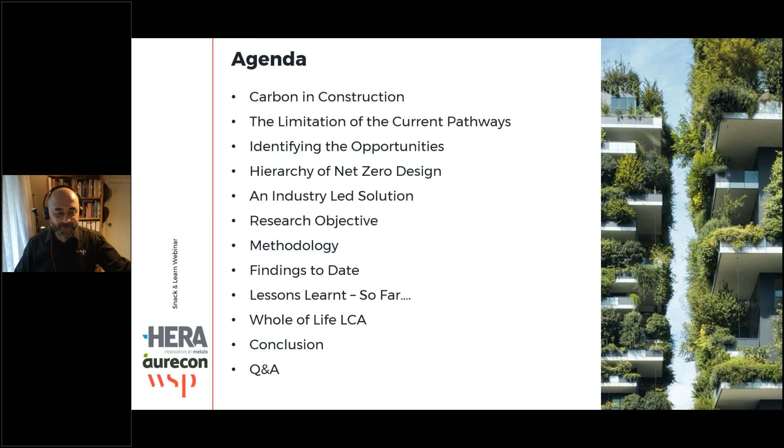Okay, let's get the show on the road. There's a lot to talk about today, so you can read this later at your leisure. I'm really keen to get into it, but we're going to talk about how we're going to solve the climate change problem. So carbon in construction, this is the industry that we are in.

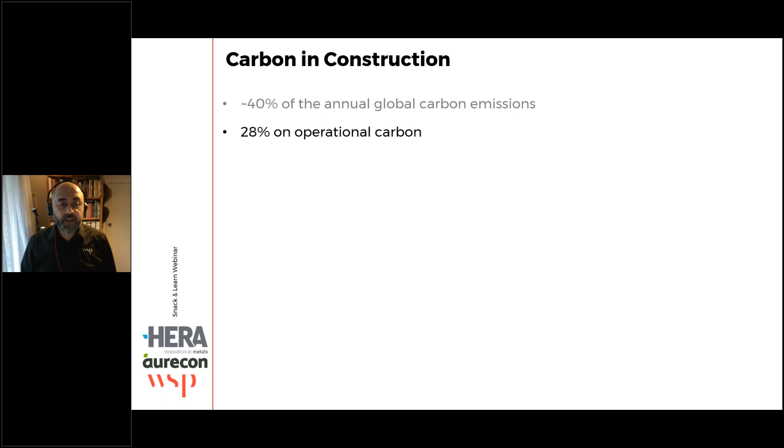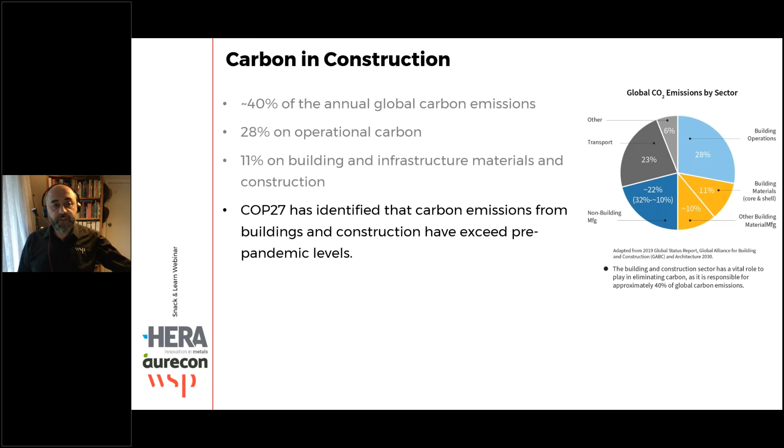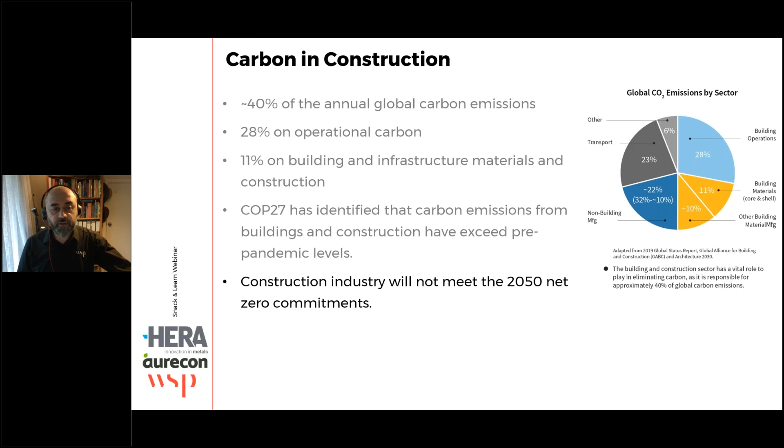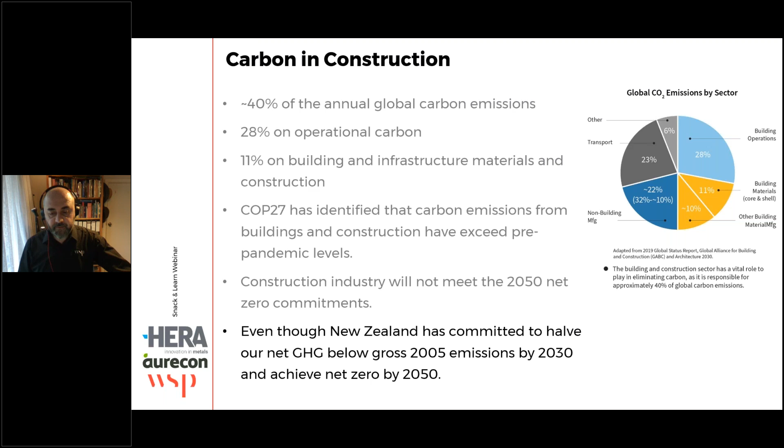Now, unfortunately, COP27 had identified that carbon emissions from buildings and construction have exceeded pre-pandemic levels, which is not good. There's an expectation that the construction industry will not meet the 2050 net zero commitments, even though New Zealand and other parts of the world have committed to halving net greenhouse gases below gross 2005 emissions by 2030 and achieving net zero by 2050. So we have a bit of a problem on our hands.

So why does it matter? Well, what we do know is the climate is changing. It's a fact of life, resulting in extreme weather events, as we saw in New Zealand with Cyclone Gabrielle, and other parts of the world are also experiencing extreme weather events, especially flooding, which have devastating consequences. The solution is to reduce the volume of carbon being emitted.

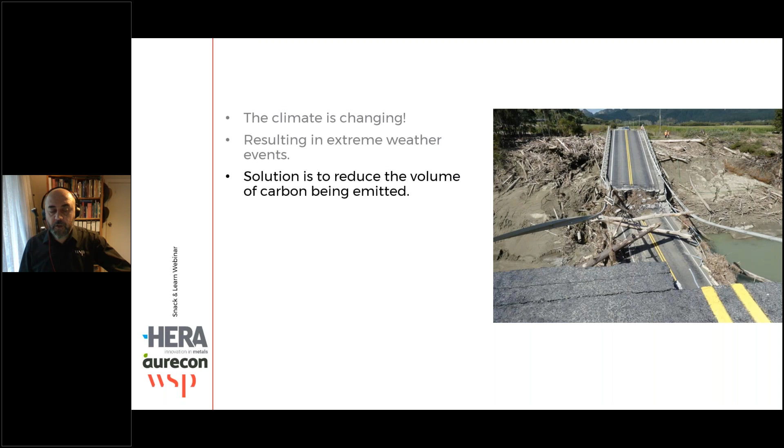Now, there's a bit of a limitation on the way we're going with this. The construction industry, based on my observations and what we're seeing, is currently focusing on carbon footprint accounting. There's a lot of dependence on offsetting, as we saw in some of the government expectations on how their aspiration is to address this issue.

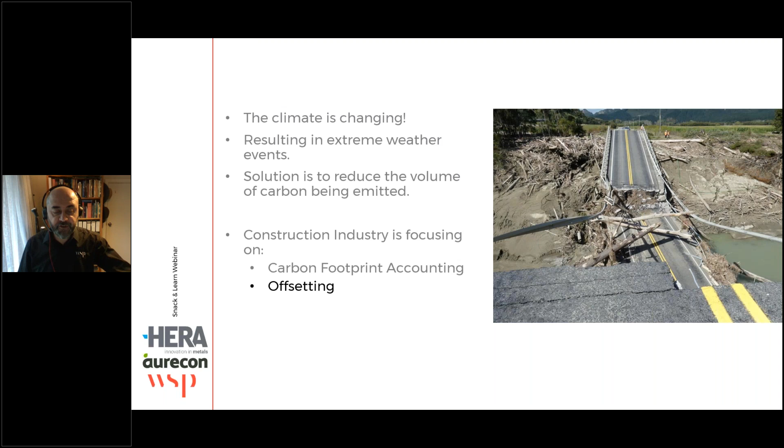The limitation with these current pathways - well, first of all, the carbon footprint accounting. There are just so many different rules and carbon calculators and ways we can assess carbon, from the ISO standard, IStructE have some great publications supporting documentation, but even BRANZ in New Zealand, from Building Research Association New Zealand, have their own calculator, and you have OneClick, which is a commercially available one. If you do compare all of these with the same building, you're going to end up with different results, even though the trends are the same.

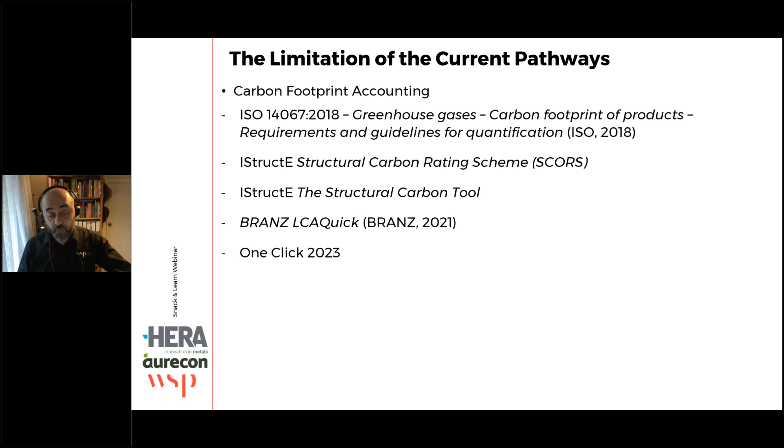So the first issue I have is which one is correct. There's no standardized way or rules to follow, so you get different results.

And the other one is offsetting, and that's a whole topic by itself, but I'll just simply say that even the New Zealand Climate Change Commission urges us to address climate change and reduce carbon without depending on forestry and carbon biogenic offsetting. So we shouldn't depend on that.

You're probably all familiar with the different modules when we talk about climate change, modules A to D. Module A is pretty much the cradle to gate, and a couple of years ago most of the focus from people you talk to, whether engineers and so forth, is how can we reduce the amount of carbon when we construct something, which is still a correct way. However, it gives you a bit of a skewed view of the world, because what about the other phases of the life of the structure?

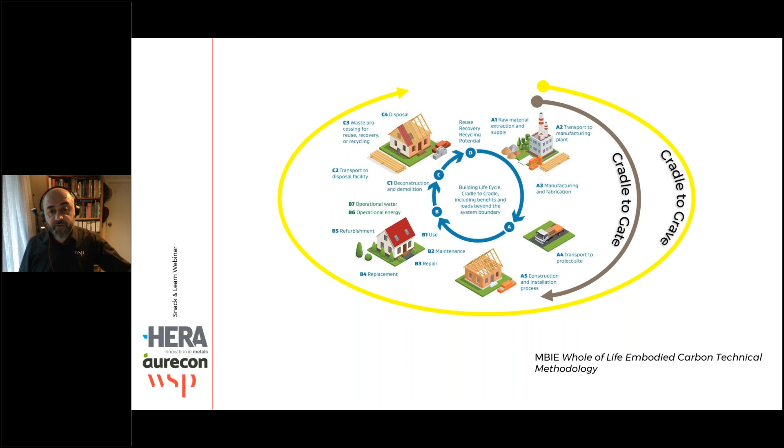In the past year there's been a shift, and now we're talking about cradle to grave, which is module A to C, all the way from building a structure until we dispose of it, deconstruct it, and demolish it. But we really need to also consider module D, because that's where, depending on what you're building with, is where the magic happens. We need to consider the whole life cycle, cradle to cradle - that's really what we're talking about with circular economy and so forth. That's the phase that's currently a little bit missing in the opportunities there.

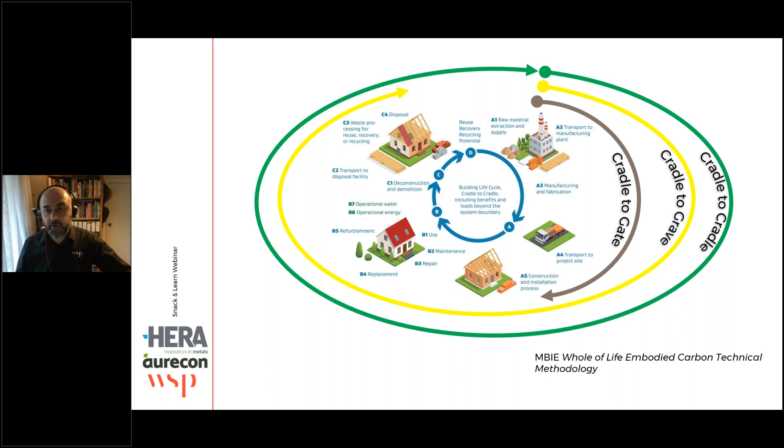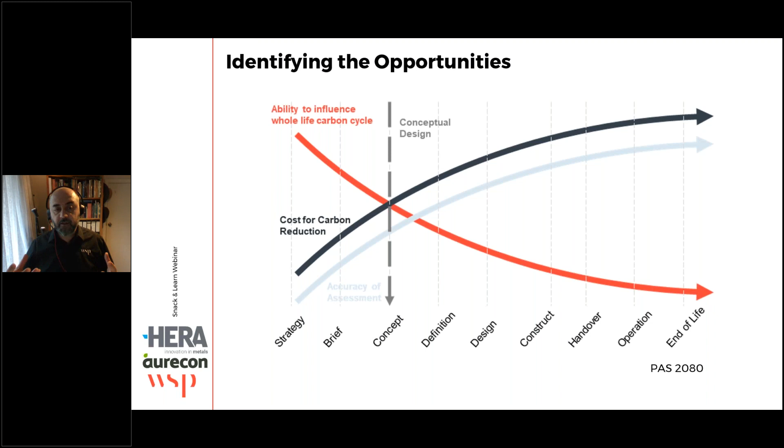So what are the opportunities? This is from PAS 2080 data - 80% of the ability to influence the reduction in carbon is done at the concept stage. In my view, it's really late to start doing your carbon calculation when you've already designed a building, at the design phase, because your ability to influence the reduction of carbon is significantly reduced. So we need to develop tools and guidelines for engineers upfront at the early stages of design, or even when someone thinks of 'I need to build something,' to identify where the opportunities are, so that by the time you get to design stage, you have designed a very carbon efficient, reduced carbon solution.

So how do we get there? IStructE have an awesome guidance out of the UK - hopefully a lot of you are familiar with that - for the hierarchy of net zero design. We're starting from here: you use less material, use lower carbon materials, and offsetting is like your final option, really.

Now the issue I have with this guidance, the hierarchy, is they start with 'build nothing,' which is easy to say when in the UK, for example, apparently up to 90% of the buildings they require are already built. While for growing countries like New Zealand, but even North America or other countries around the world and developing nations, they still need to build. So the approach to how you get in and design something changes based on what you see on the ground and what you have.

It's still correct - if you do have an existing building, your first solution shouldn't be 'I need to tear it down and build a new one.' It's like, can I reuse it? How can I do that? And then you go to the following steps, from build less, build clever. It's all about efficient design, reusing, repurposing, and so forth.

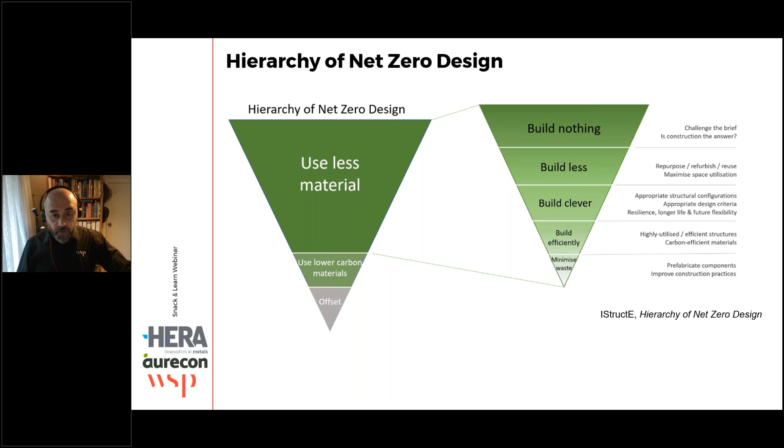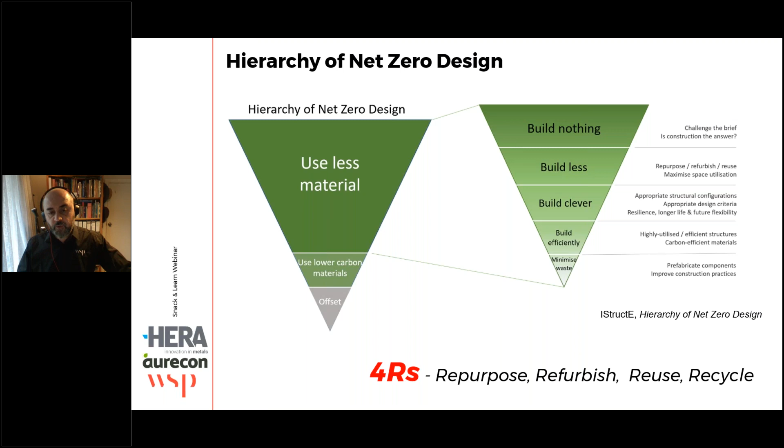So what's being proposed in this project is, how can we develop - let's call it a New Zealand hierarchy or an alternative global hierarchy, whatever you want to call it - of net zero design, but by embedding what we're terming the 4 R's: repurpose, refurbish, reuse, and recycle. Pretty much developing the guidance so engineers enter a project with those 4 items, the 4 R's, already at the back of mind and at the basis of all design.

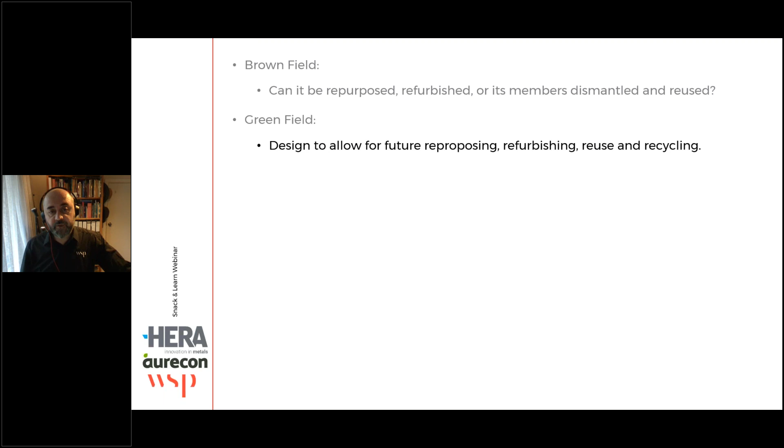Which then results in, how do you achieve this - so when you have an existing building or existing structure, you call it a brownfield, for example. Your first question should be: can it be repurposed, refurbished, or its members dismantled and reused? But if you do have to build new, then it's a different problem - how can we design to allow for future repurposing, refurbishing, reuse, and recycling?

At the moment in New Zealand we design for 50-year life, but we should design for longer, even 100 plus years. How do we consider designing for 100 plus years then? That has its own challenges. Should we base the decision of the structure's importance level - which is a function of the expected loading, especially wind and seismic, and the probability of occurrence - which will affect how we design, and the load that the building is expected to encounter over its life?

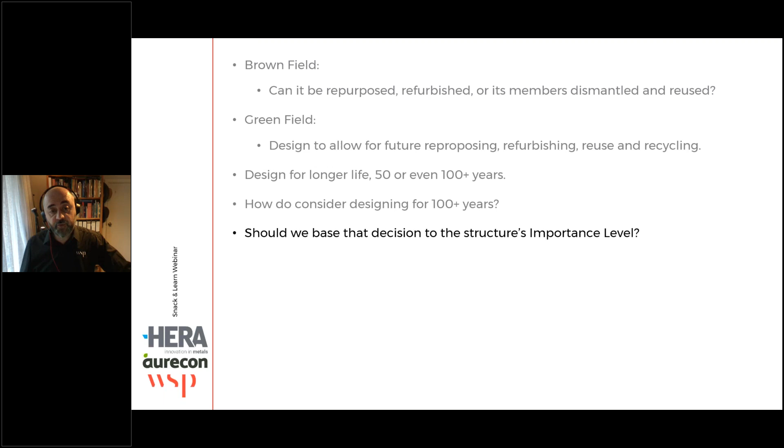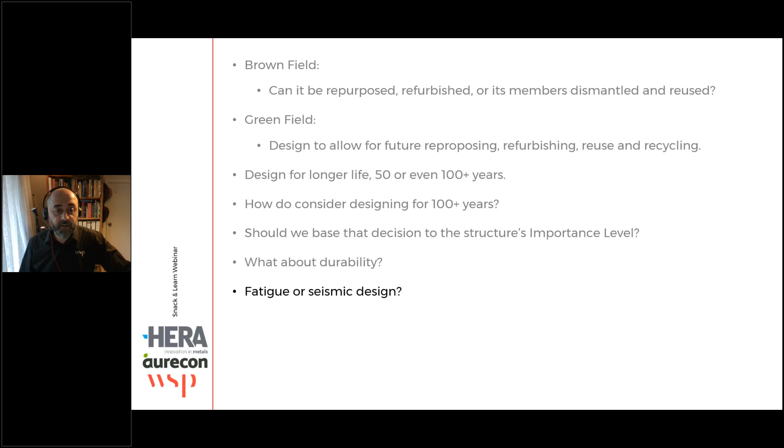How do we deal with durability? What about fatigue and seismic design, especially fatigue, as currently all the stress curves are based on 50-year life? So we have to update and revise our design standards to allow for that. How do we cater for new structural systems such as steel timber hybrids or modular systems? And really, anything we do from now on, we need to maximize waste minimization and offsite construction.

So we have a problem. How are we going to solve it?

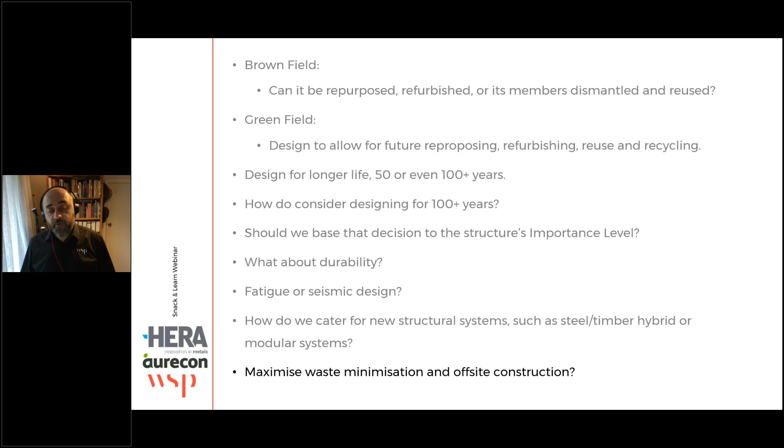So in collaboration, the Heavy Engineering Research Association, HERA, which is in New Zealand and does a lot of R&D for the steel industry in New Zealand, has partnered with WSP and Aurecon.

To develop a solution, we have an industry advisory group, which includes MBIE, the Ministry of Business, Innovation and Employment, the Structural Engineering Society, SESOC, Concrete NZ, the Timber Design Society, and the Timber Design Center. Pretty much we've teamed up with the three main construction materials, steel, timber, concrete, and the Engineering Society, anybody who's anybody in New Zealand, to develop a solution.

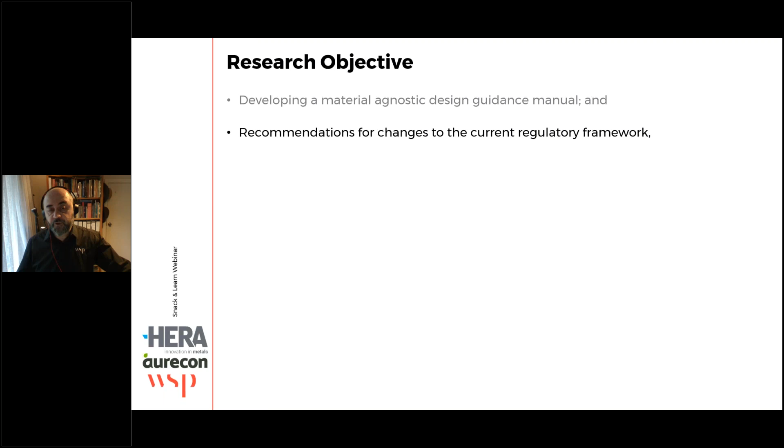What we're trying to do is develop a material agnostic design guidance manual. As well as the output from this project, there's a recommendation for changes to the current regulatory framework to allow and realize those opportunities to reduce carbon in construction.

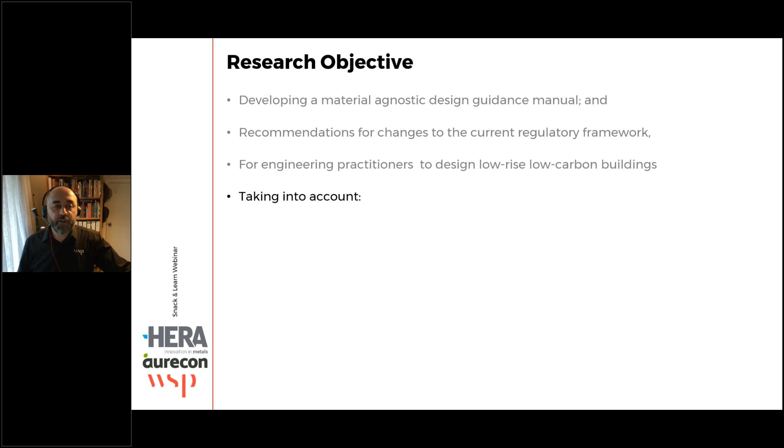At the moment, we're focusing on helping all engineering practitioners design low-rise, low-carbon buildings. And we're going to take into account the whole of life, cradle to cradle life cycle assessment, module A to D, so not just module A or A to C, it's the whole of life.

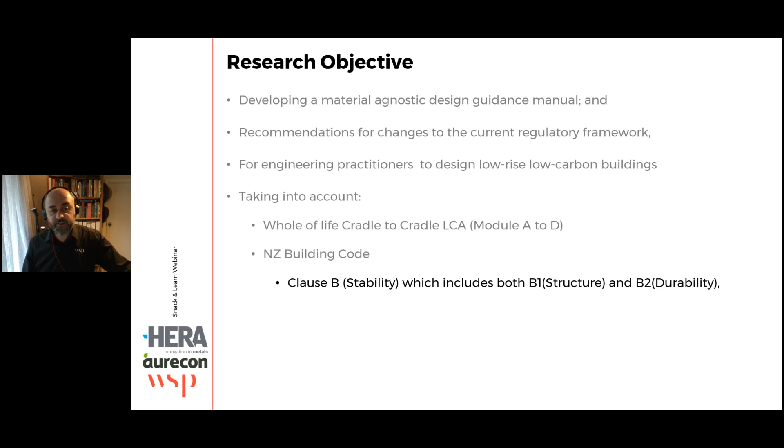We're also looking at the New Zealand Building Code to identify the opportunities. So we're looking at different clauses, in this case clause B for stability, which includes B1 structure - this is related to design - and B2 durability.

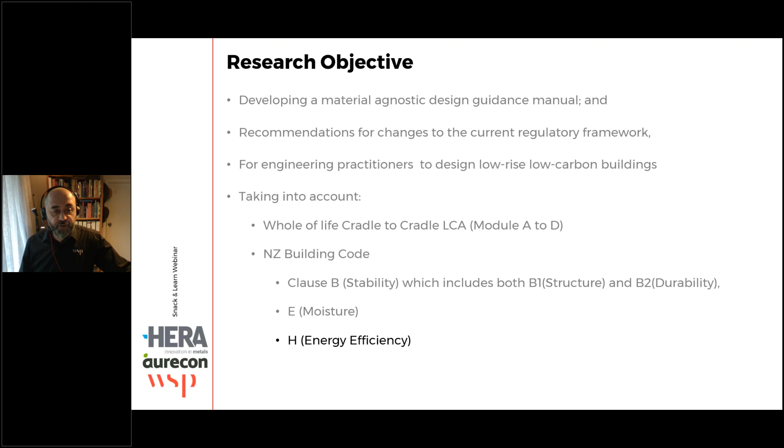We're also looking at moisture and H energy efficiency, as well as focusing on reducing operational carbon, which I've identified that not many people are really taking into account. And what is the contribution of the building substructure?

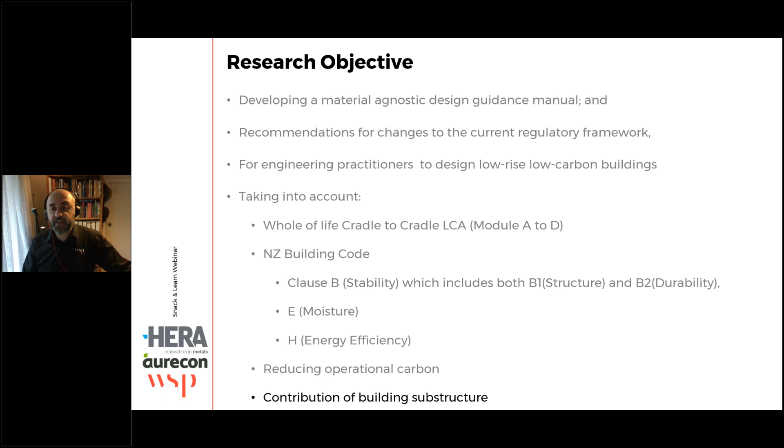I've heard examples where someone designed a beautifully net zero building, however their foundation is so full of concrete that you would never actually make up for the carbon spent there. So there's a bit of a disconnect because substructures are out of sight, out of mind, and sometimes not really considered.

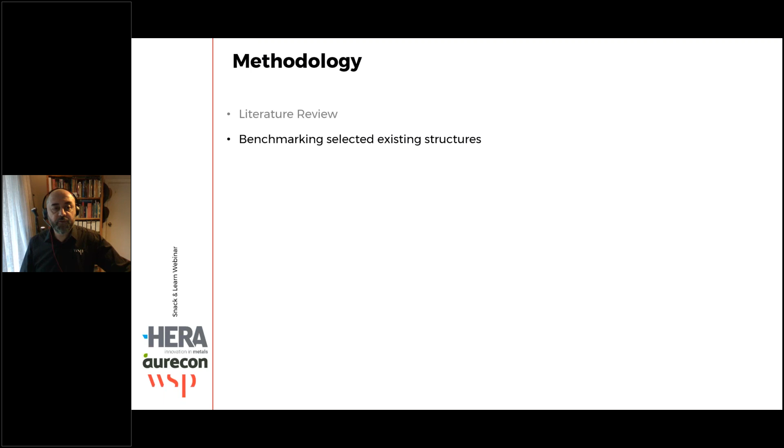So what's the methodology of this research? We're doing a literature review, of course. We're benchmarking selected existing buildings, so all the buildings we've looked at were built by 2020 - actual buildings - and we've done an industry survey.

We have design examples and carbon footprints, and based on the findings, we used a selected benchmark building to consider different materials - steel concrete composite, concrete, steel timber hybrid, and so forth. We're playing around with the grid layout to try and identify the most efficient layout for the material in question.

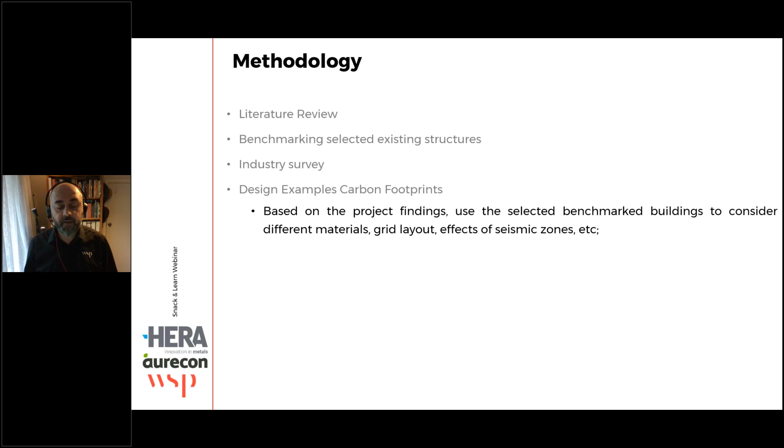What are the effects of different seismic zones, soil conditions and so forth in a building design, with the aim of identifying the optimal design parameters to achieve the lowest embodied carbon, taking into account the structure's whole life cycle module A to D and the New Zealand Building Code clauses.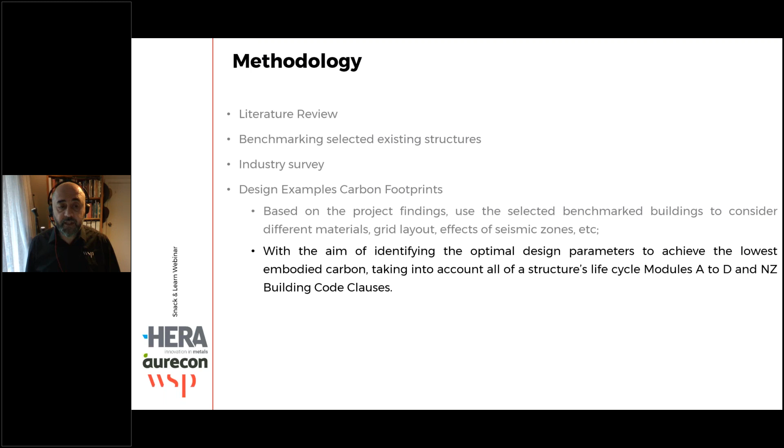We're going to undertake a carbon footprint analysis for the developed examples, and comment on the impact of other life cycle considerations, which apparently again are not really considered, especially costs - if you change your solution, what will the cost be? And the other big question is, is it actually available?

There's no reason - I've seen examples where someone designed a beautifully low carbon solution, then went to market and the contractors came back and said, we cannot buy this stuff, or it's very expensive. And of course, we're going to end up with a report about all this.

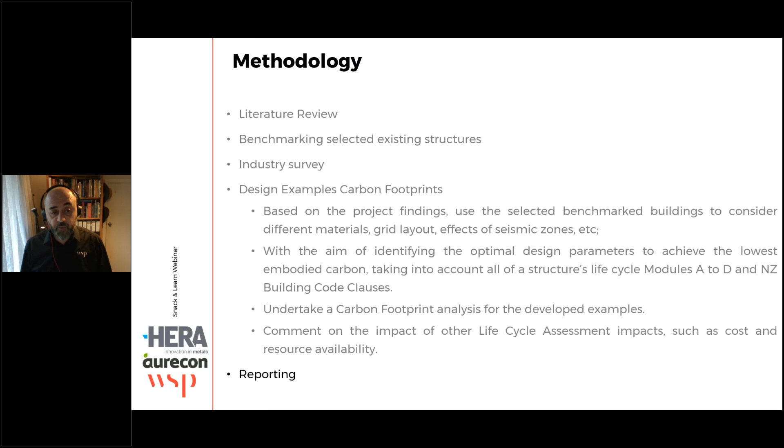Findings to date - okay, this is the new bit. So this here is our steel concrete composite building. This is one of the examples we've done. This is for the superstructure.

We then went and redesigned it, and I have to say for the steel concrete composite building, it does have a concrete shear wall as part of a seismic restraint system. We then redesigned that for a steel timber hybrid, but still with that concrete shear wall. So you can see there was a slight reduction. This is excluding module D and biogenic carbon sequestration - we'll touch upon that later.

Now we've taken our steel concrete composite, removed the concrete shear wall, and changed it to a moment resisting frame, and you can see there was a significant reduction. We did the same thing and put in an eccentrically braced frame, so we're basically seeing the influence of the seismic restraint system on the design, and there is a significant reduction. But if you look at the hybrid, the steel timber hybrid with the eccentrically braced frame, that gave us the lowest solution. There's something more interesting that happens later with this solution.

You can see, depending on the different seismic system used, introducing timber does end up reducing the superstructure's global warming potential. Now, this is not it.

As of yesterday, we've now introduced the same building in reinforced concrete, replacing the whole thing with reinforced concrete, and the intention now is to talk to the concrete industry and see how we could reduce carbon from concrete, looking at different mixes and so forth. We're also going to talk with the timber people and develop with them a timber solution to have a full picture. This will all be published later.

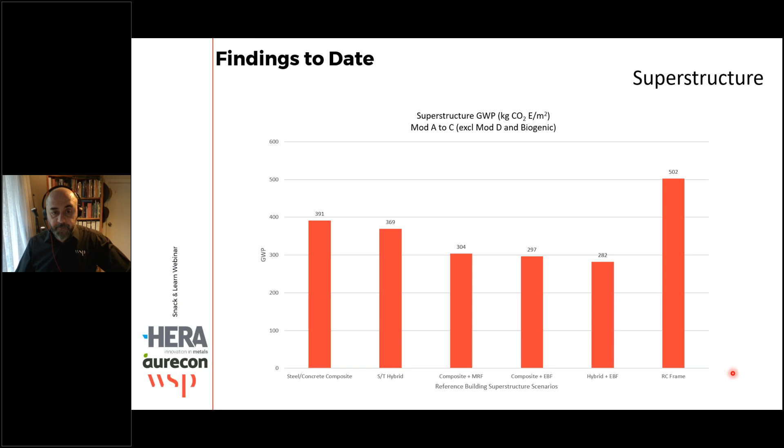Another thing we want to look at is substructure. We've developed this flowchart, and the whole intention is to give the engineers the right questions and tools to ask the geotech.

Understanding what the different solutions are, whether shallow or deep foundation, and what their carbon potential will be. In some situations it may actually be simpler to say your site is so bad that no matter what you do, you're never going to recoup that carbon, so you might as well select a new site. This could be a tool for developers up front to ask, am I building in the right location? Now, why are we looking at substructure?

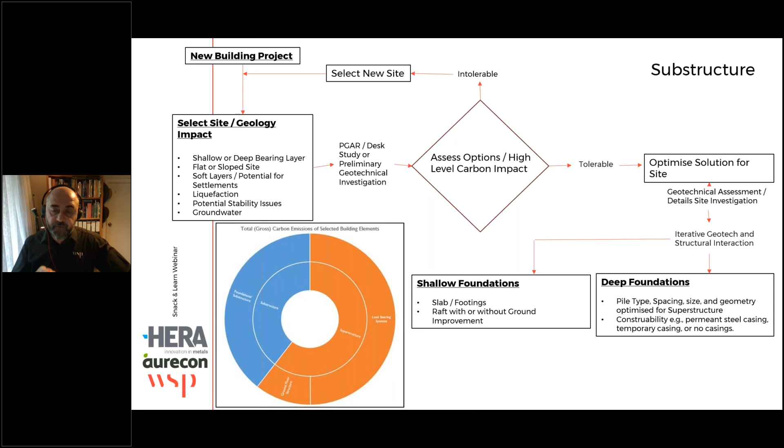Because what we've assessed, depending on soil conditions and so forth, the carbon emissions from the substructure could consist of 40 to 60% of the total carbon when you take the sub and superstructure together. So a considerable amount could be in the foundations. It's another great opportunity to identify early on and save on carbon there, not just focusing on the superstructure itself.

Now, this is the big one in my view, and this is where the biggest impact can be - it's basically the carbon from operational carbon, electricity use effectively. So the first graph here is looking at a lot of countries. We still have boilers and air conditioning, so it's not just New Zealand.

There's been quite a bit of a shift replacing those in New Zealand. If you take the building we've selected, this is the amount of energy, CO2, to be used over its 50-year life. The issue we found in New Zealand's building code, clause H1, related to thermal insulation, is that it actually allows for thermal bridging. This is not an issue in other countries, but in New Zealand we have that issue, and you can see a significant amount of energy being spent because of that.

Now, if we introduce thermal breaks in our buildings, we can reduce that carbon and energy consumption significantly - more than half, just by putting in a thermal break.

Now, this is the old H1 rules, which, technically speaking, the building was built according to the standard of the day. In 2023, the building code H1 insulation rules have been updated - they've doubled or even tripled the amount of insulation required, the R-values, to reduce them. But the issue we found is it still allows for thermal bridging.

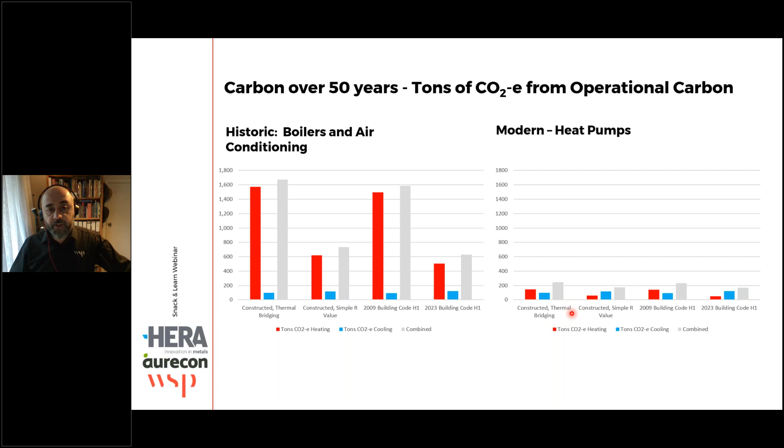This is something for not just New Zealand, but for the whole world. What happens if we update and change our boilers and air conditioning to more efficient heat pumps? Even just going to heat pumps from the beginning, assuming the old standards and allowing for thermal bridging, we've reduced it significantly. So the simplest solution here is get rid of your boilers and air conditioning and use more efficient heat pumps.

But again, if you introduce the thermal break, that reduces it significantly further. The new H1 rules aren't too bad compared to this, but it could be better. What we're saying is if you use the old H1 rules with the thermal break, you can have a significant reduction compared to what we're having now. Now, this is all great - quick solutions: superstructure, substructure, and operational carbon.

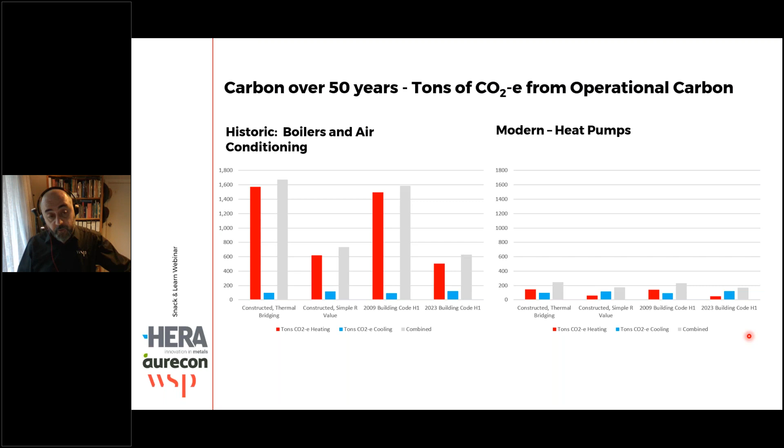But what does it mean, and how should we look at it when we look at a whole of life cycle assessment and put it all together so that it can really impress and show what the opportunities are?

So we put a pie chart. This is all the carbon that this building has from operational, which you can see is a significant amount compared to the superstructure and substructure for our steel concrete composite building. This is our reference case with boilers and air conditioning, what we used to do. And you just look at this here, and the first thing when you look at it is say, hold on, there's a significant amount of carbon over the 50-year life of the building from operational that's significantly greater than what we're putting in for the superstructure and substructure module A components.

So what we did, we had the A to C, and that gives you here around 1,564 kilogram of CO2 equivalent per square meter of this building. The building was around 1,755 square meters. And if you take module D and any biogenics, that gives you a little bit of reduction. But in this particular case, we have steel and concrete. Again, the first thing you'll see is I need to reduce this.

Now, if we take into account our steel timber hybrid, even though from a superstructure your frame has significantly reduced, especially when you take biogenic into account, if you look here, it's 109, reduced from 261. Sorry. Again, it's like, wow, we've reduced the amount of carbon, but you still have that significant amount from your operational. So the next solution is, okay, we're going to put the thermal break, H1 rules, in the old building.

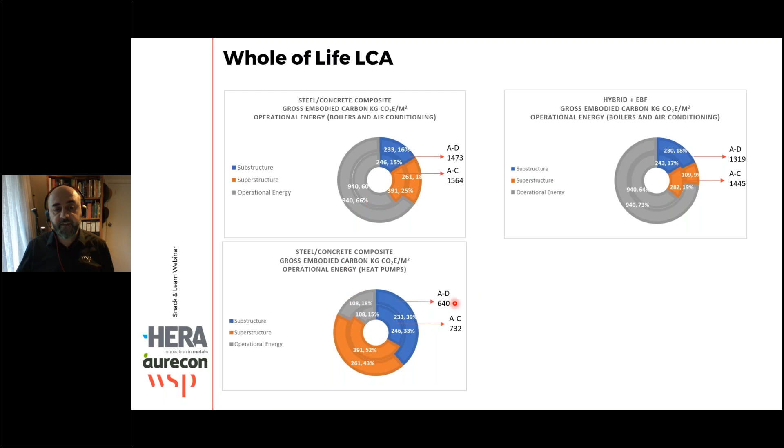Even if you take your steel concrete composite building and reduce your operational carbon, that is already a 50% reduction in carbon. And you haven't done anything different from what we do at the moment. But the beauty of this method is now you can say, okay, I found this big operational carbon emission here, I've reduced it significantly, I've achieved 50% reduction. Awesome, this is an easy fix to do. We can do it now. But I really need to reduce now the next big thing, which is your superstructure.

And that's where going to a steel timber hybrid with a better seismic restraint system, you've reduced it even further. You can see here, this is when the biogenics are taken into account. You can see here, we started with 1,473, and we reduced it by two-thirds, effectively. So the next step, again, when you have a look at this now, you say, oh, now I need to reduce my substructure carbon. So that's your next challenge.

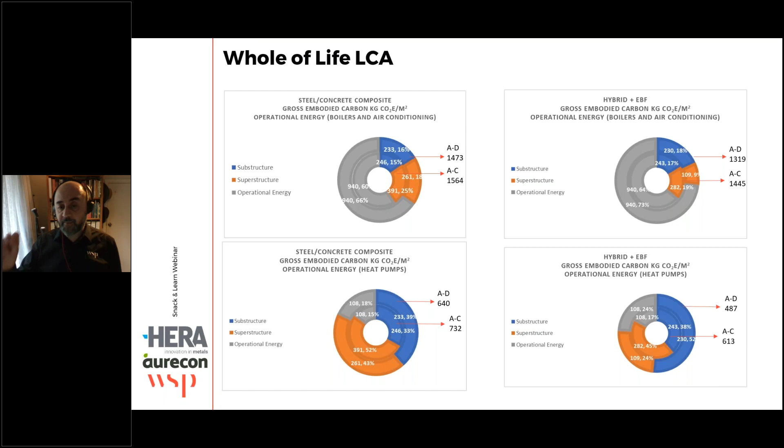But you can see by changing the perspective of how we account for the carbon throughout the life of the building, you can quickly identify where the big opportunities are, and then you go down the hierarchy: this is a simple fix, I've reduced operational, let's go to a steel timber hybrid, that's awesome, and next step is how to reduce the concrete contribution. Again, I don't have the answer now, but that's coming up next later on in the report when we issue it. So, lessons learned so far.

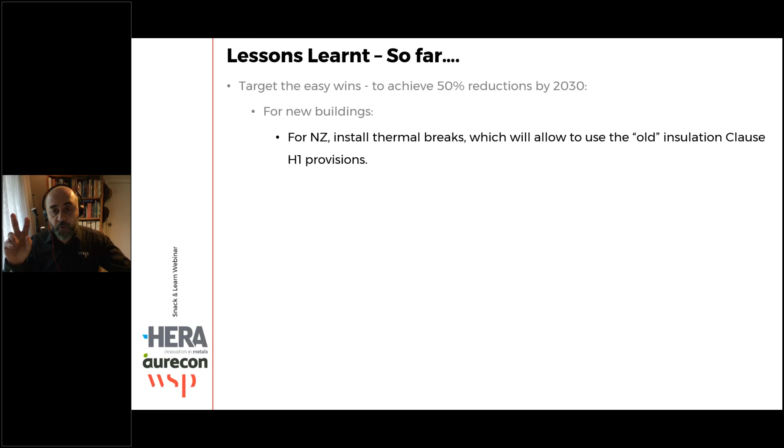Target the easy wins to achieve 50% reduction for 2030 for new buildings. From New Zealand, install thermal breaks, which also allow the use of the old insulation clause H1 provisions. This in turn will assist in reducing the upfront module A embodied carbon as well from reduced insulation. If you have that in your country, if you already use thermal breaks, you're better than us, you're halfway there. So your next solution is to install heat pumps for both heating and cooling - go to a more energy efficient heating and cooling system.

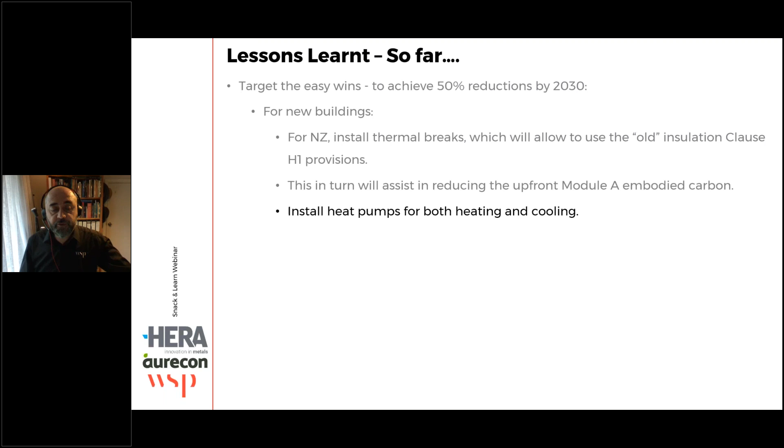That's an easy win. You can reduce 50% operational carbon of your total embodied carbon just by doing those. For existing buildings, convert to a more energy efficient heat pump, replace boilers and air conditioning, and increase your insulation levels with the aim of reducing energy consumption. Again, this is something you can do now.

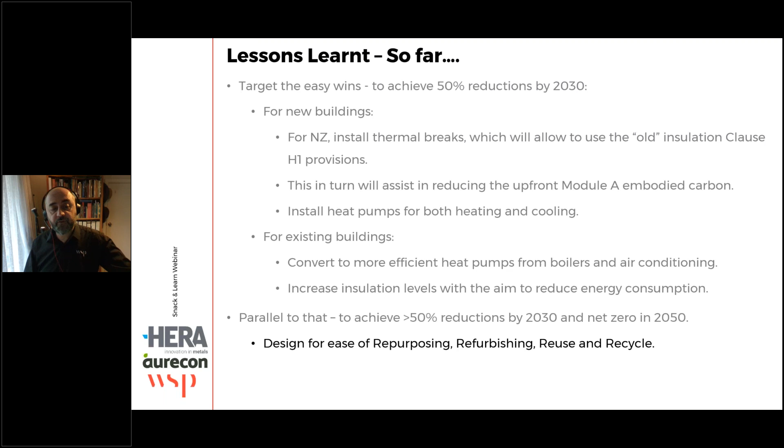Parallel to that, to achieve greater than 50% reductions by 2030 and net zero by 2050, we need to design for ease of repurposing, refurbishing, reuse, and recycling, designing for longer life with durable, low maintenance components, and designing with more efficient, lower carbon components.

Now, the good news is, whether it's steel, concrete, timber, whatever, they're all heading toward those net zero or low carbon components. Every day we hear new developments in technology that allow for net zero steel, low carbon concrete, or net zero concrete. The expectation from what I've seen is those solutions will be commercially available, likely to be commercially available post 2030, between 2030 or so.

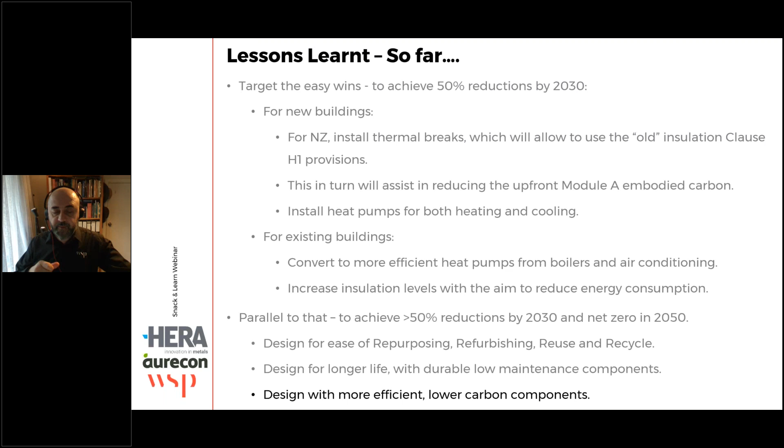So it will definitely be there by 2050. But what do we need to do now? Save operational carbon to achieve 50% reduction. But how do we achieve greater than 50% reduction for engineers? How do we design for repurposing and refurbishing? Everybody says it's easy, it's there, but you actually need to provide guidance for engineers to do that. So what we've developed is this framework.

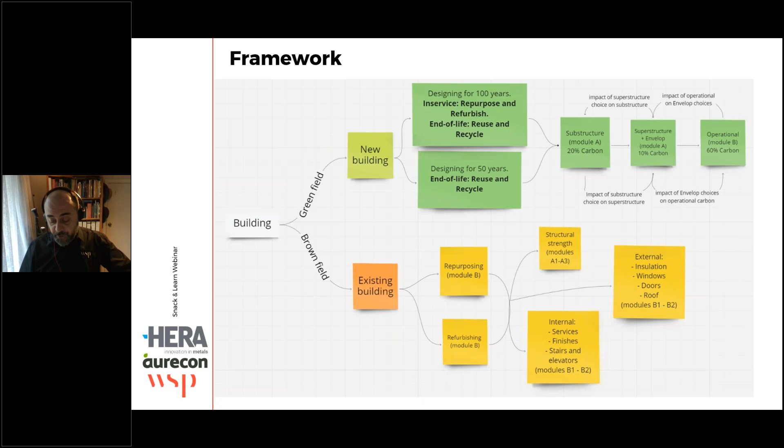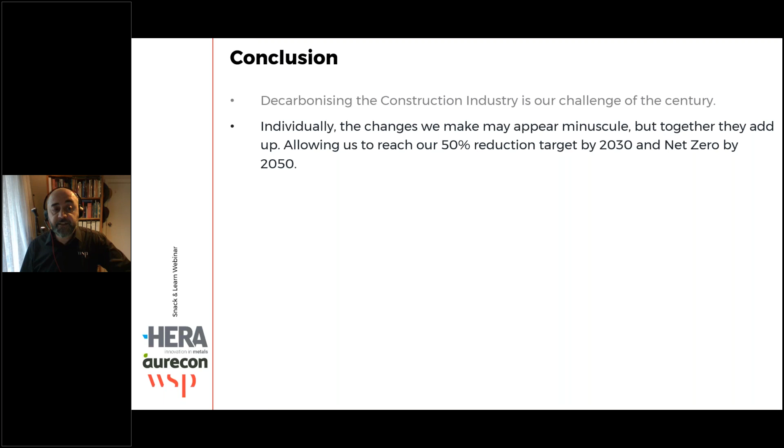So in conclusion, decarbonizing the construction industry is our challenge of the century. Individually, the changes we make may appear minuscule, but together they add up, allowing us to reach our 50% reduction target by 2030 and net zero by 2050. It's an exciting time for innovations, and our industry is well placed to deliver solutions that will drive down emissions and help lessen the impacts of climate change.

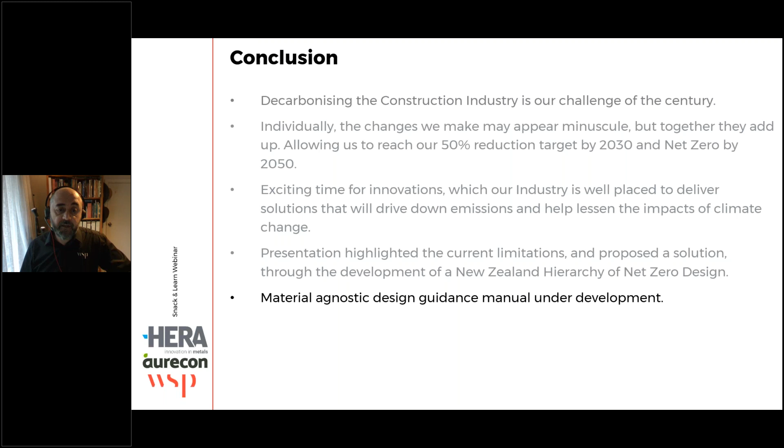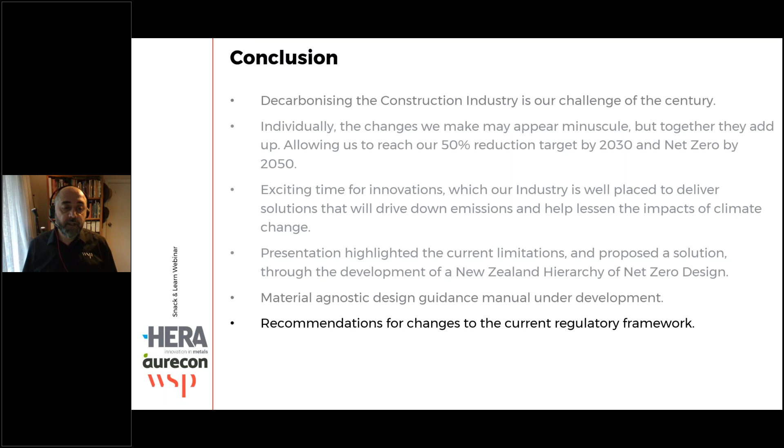This presentation highlighted the current limitations and proposed solutions throughout the development of a New Zealand hierarchy of net zero design, while we're also developing a material agnostic design guidance manual, and recommendations for changing the current regulatory framework. We're going to have a discussion with HERA in the next couple of days about the H1 clause, for example. Together we can create a greener, cleaner, and sustainable world for future generations. Thank you.